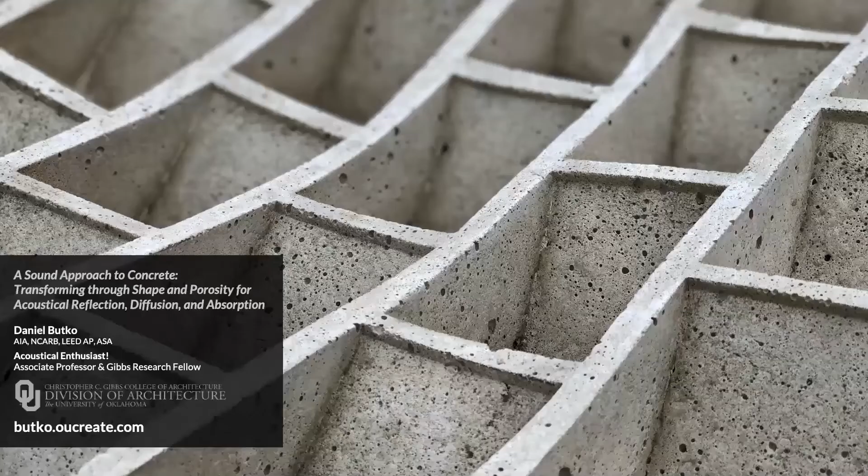Welcome to A Sound Approach to Concrete. My name is Daniel Butko, and I am excited to share some acoustical research.

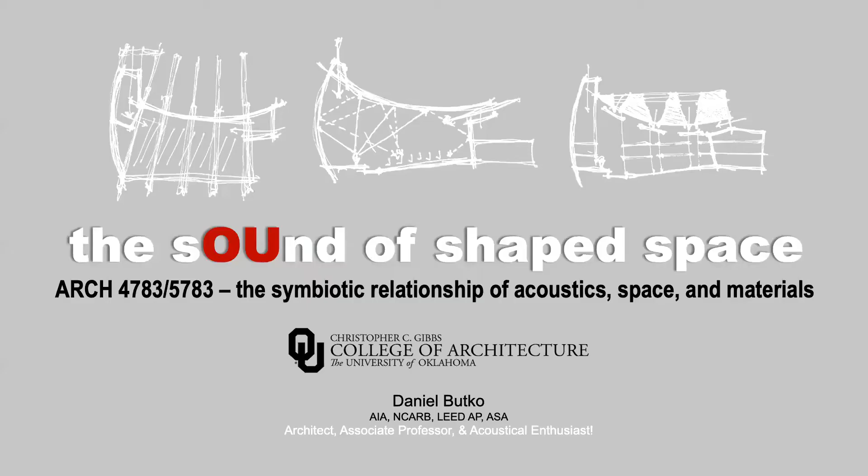Other than incorporating acoustics into design studios and materials and systems courses I teach, I also introduced an undergrad and grad elective titled The Sound of Shaped Space at OU over a decade ago. This course has also fostered continued acoustic research over the years, including some of the content in this presentation. Student accomplishments have been recognized by the Acoustical Society of America, the AIA, and other organizations.

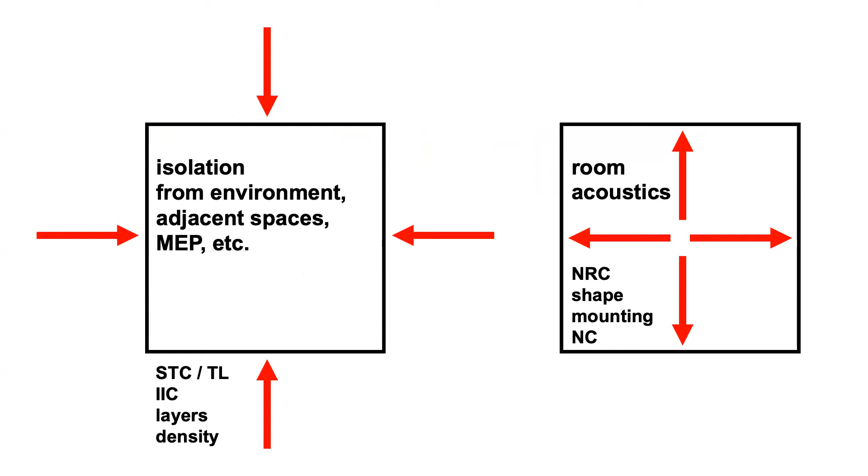As designers and architects, we have access to various codes and guidelines which help produce healthy and supportive aural environments. At its most basic, sound is typically wanted and noise is not. Architectural acoustics deals primarily with two aspects of sound and noise: the exterior or external isolation between spaces, and the interior or internal room acoustics of how sound and noise interact with the shape, the layers of materials, and the impact on the occupants.

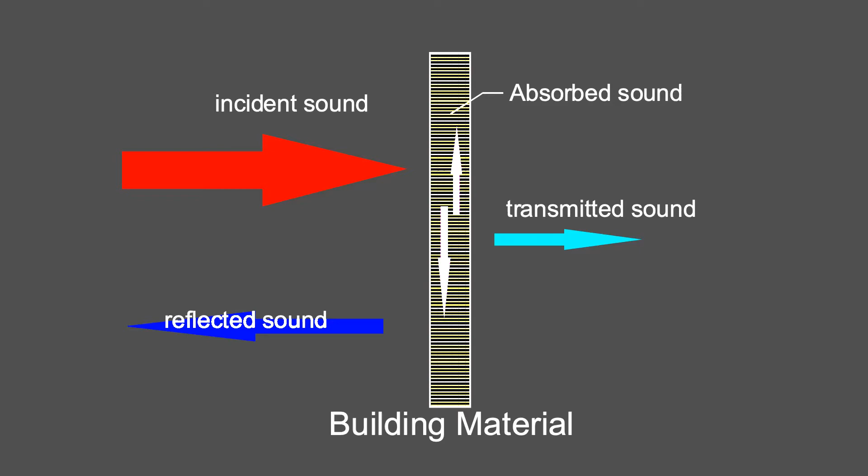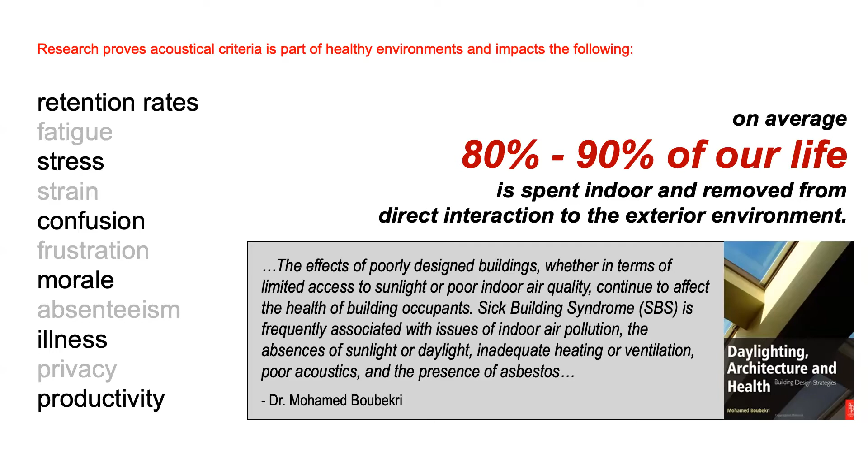As frequencies of sound and noise interact with wall and floor assemblies, they can be reflected, either specular or diffuse, and then absorbed or transmitted into or through those layers of materials. The aural environment has a direct impact on human perception, emotion, health, productivity, etc. Various statistics relate occupant behavior and health to acoustical properties.

Sound. It's not just the air vibrating, sound means feelings. It refreshes our minds, soothes our hearts, it can make us happy or sad or excited. It also is essential to the communication of ideas and the exchange of information. It's vital to daily life.

That's my version of a simple yet profound statement that's used as an anechoic recording in virtual environments, modeled in EASE software, to generate spoken simulations or what are known as auralizations of design concepts.

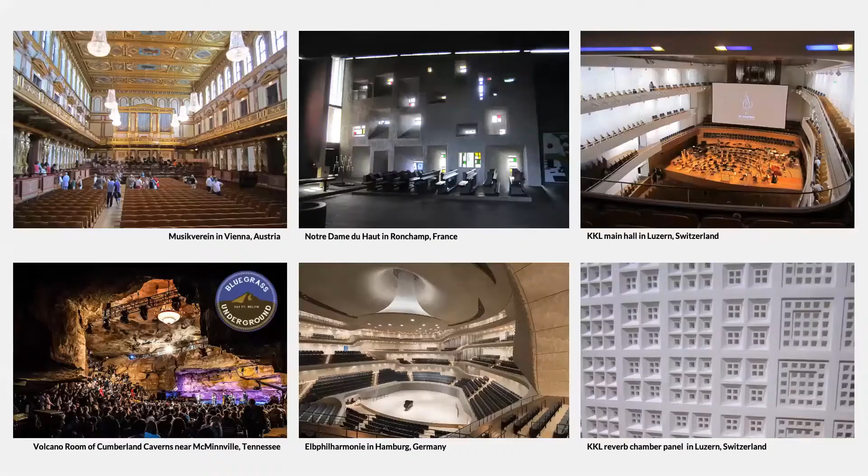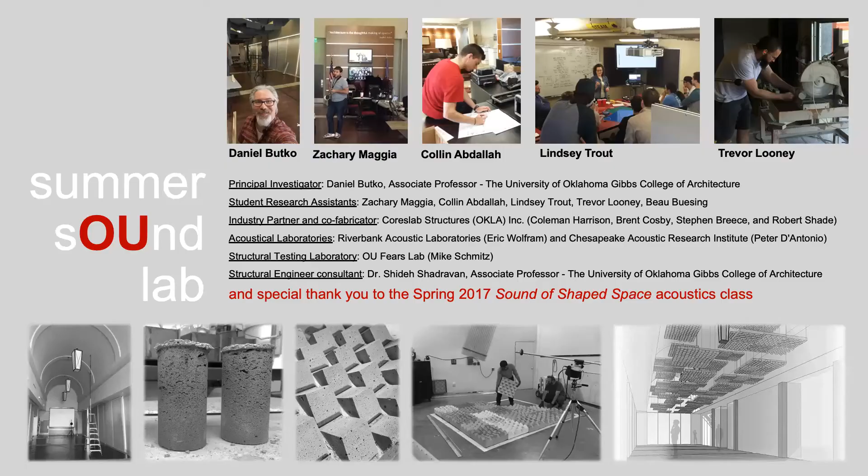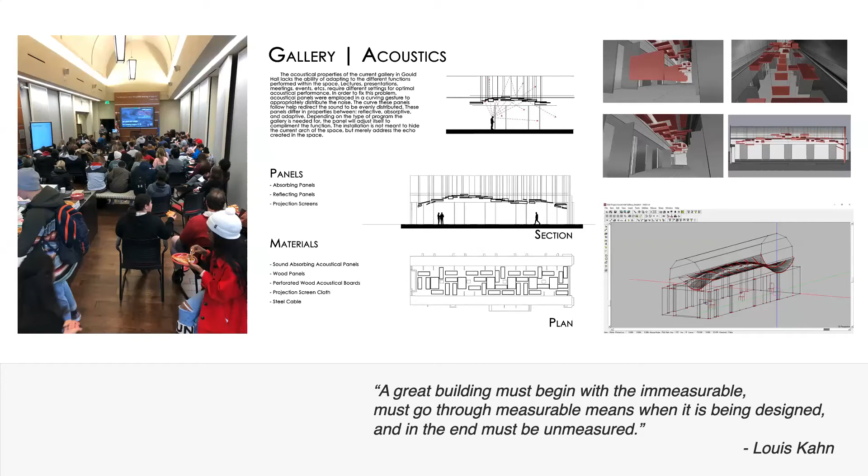Current research and the main topic of this presentation began in the spring 2017 acoustics elective and rolled over into what we called the Summer Sound Lab and various other phases of data collection and prototype development in the years that followed. Student researchers and I evaluated spaces for common acoustical deficiencies, which identified a gallery space as a place-based physical sound laboratory for collecting measurements and developing initial concepts.

The team analyzed the space and surrounding enclosures using equipment calibrated to collect quantifiable acoustical data per ASTM standards. Recycled denim blankets were also used to define a more absorbent control and develop accurate virtual models in EASE software.

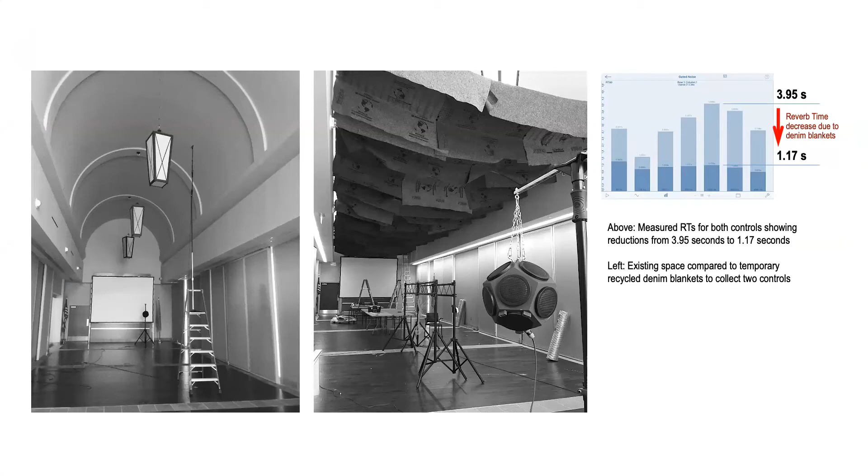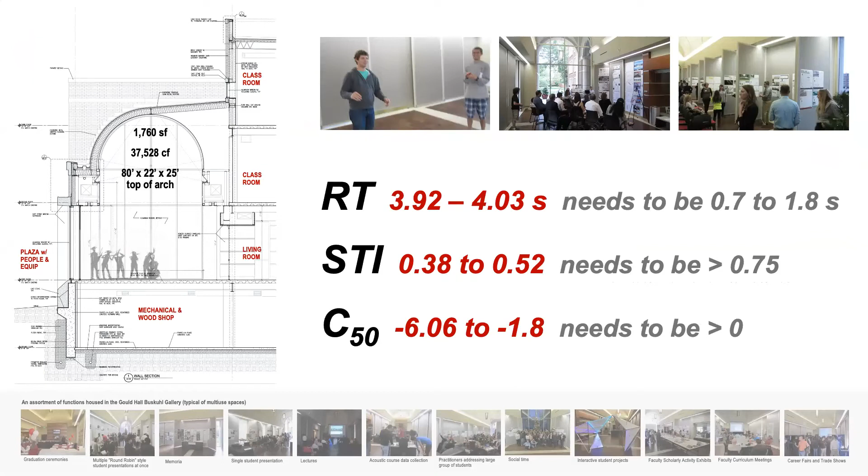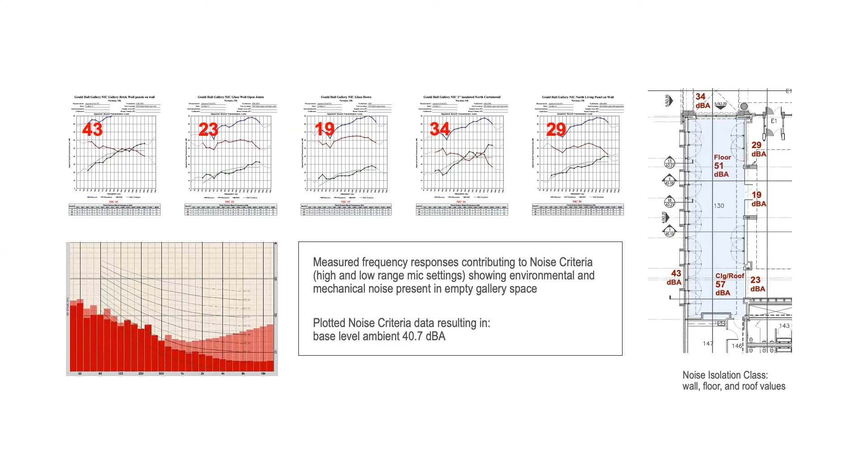Occupants report discomfort and confusion related to acoustical issues in the space, primarily a lack of comprehension based on the acoustically reflective materials and spatial volume, producing high RT, low STI, and low C50. The measurements also demonstrated low noise isolation class or NIC values, which are similar to a field or apparent STC test for wall and floor assemblies, also causing noise criteria NC to exceed published recommended limits.

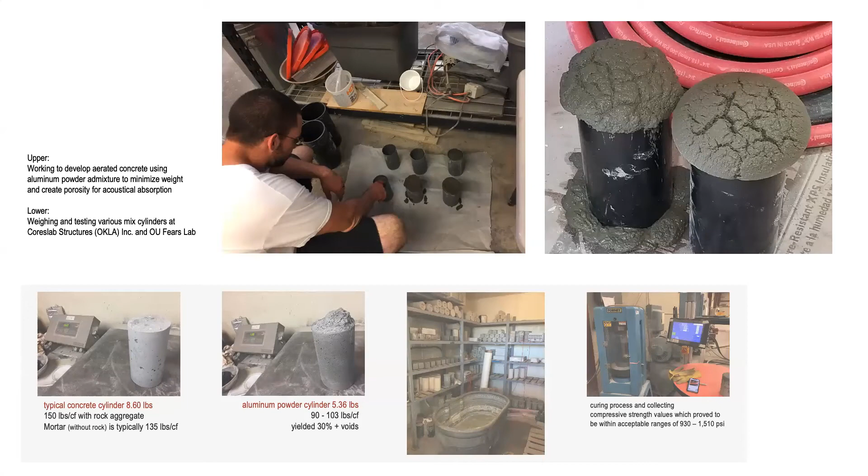Literature reviews and experimentation led the team to begin exploring concrete for its potential as an acoustical material. The recipe and shape can complement density to provide reflection, diffusion, and absorption of sound waves. Concrete samples containing variations of numerous additives such as flax, silicone oil, nacre, crumb rubber, vegetable fibers, pumice powder, walnut shells, and aluminum powder were developed and tested.

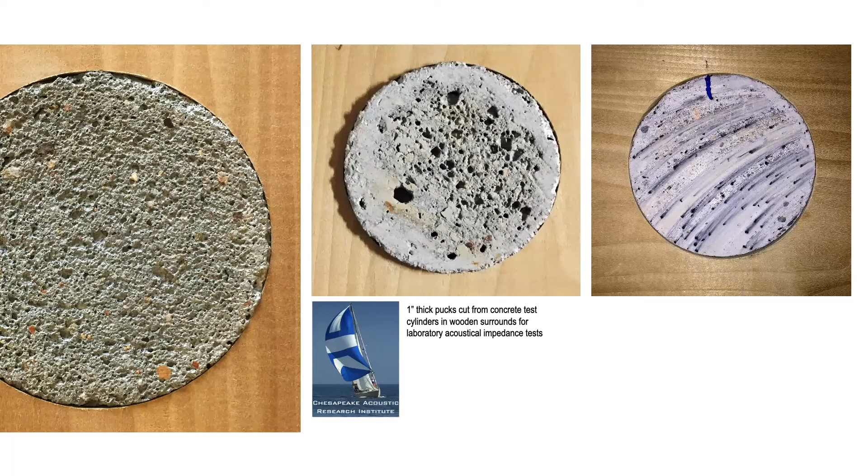The cylinders were cut into 1-inch pucks and combined with other samples from industry partners for separate ISO impedance tube acoustic tests to determine NRC values. The results showed weight differences along with variations in porosity, shape, and size. The team continued with concrete mix designs of various percentages of aluminum powder and both white and gray type 1-2 cement due to particle size affecting the reaction time and subsequent surface and interior porosity.

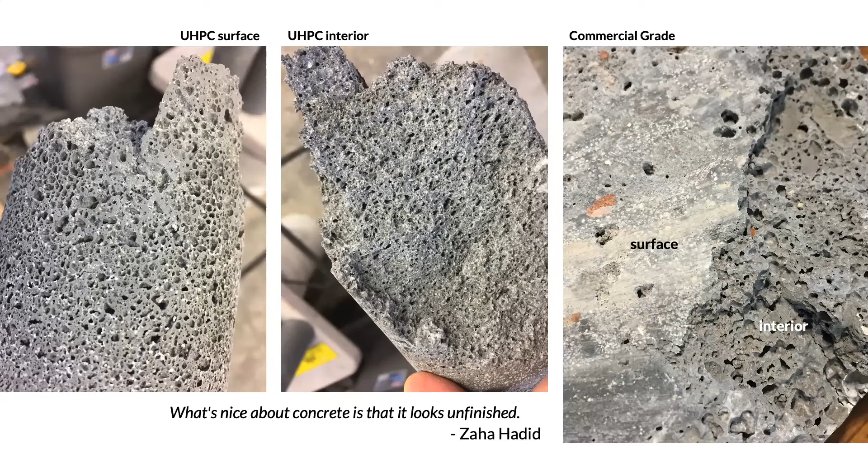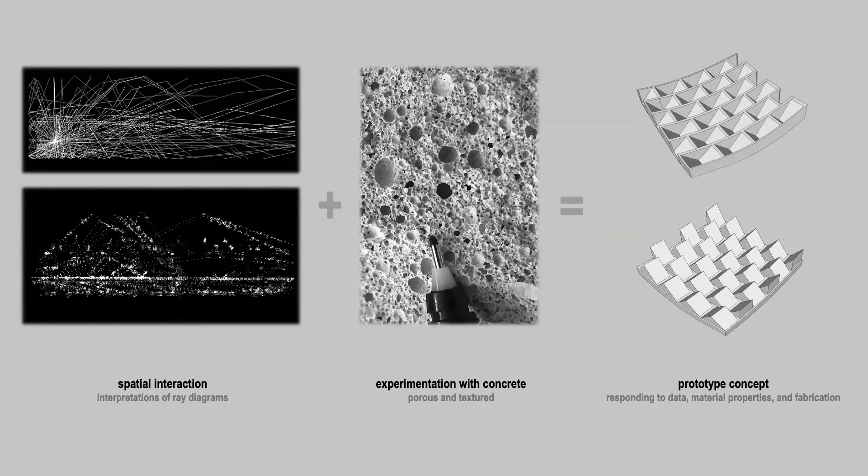The aluminum reacts with the cement to create hydrogen gas bubbles during hydration. Sound is absorbed through friction as it navigates through the pores. Evaluating sound wave interactions and experimentation with material science yielded data-driven designed panel concepts. Material and form directly connect to acoustical requirements while being feasible for addressing deficiencies in spoken word comprehension.

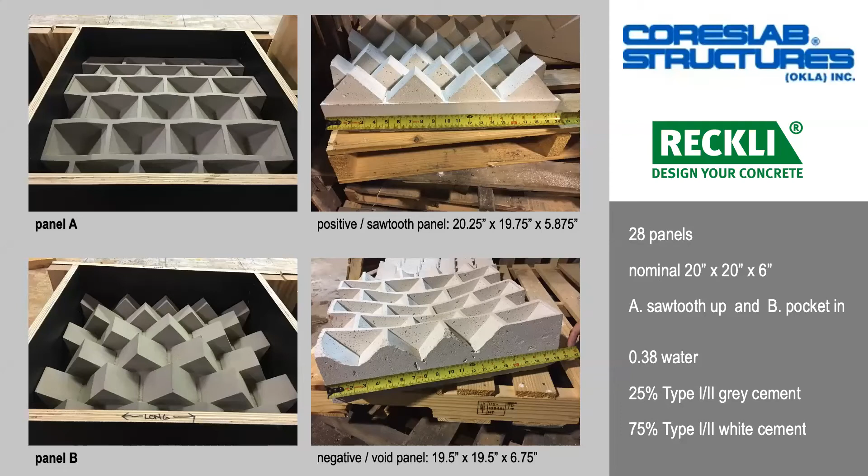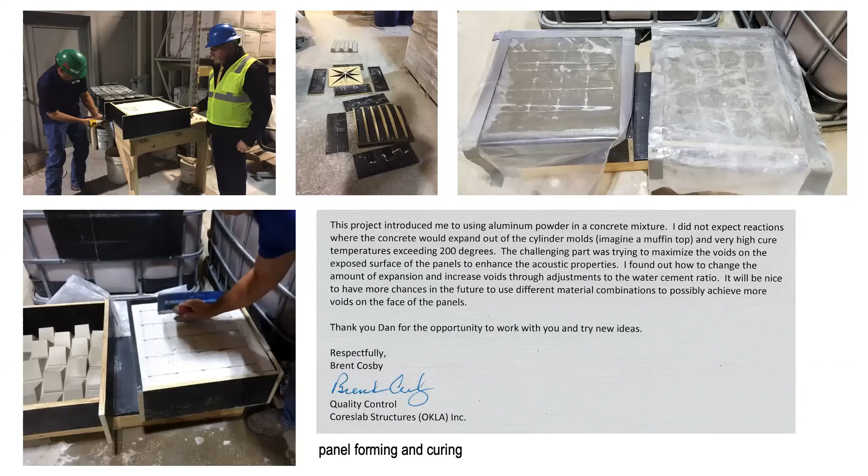The team worked with industry partners to fabricate custom concrete panels with nominal dimensions of 20 inches by 20 inches by 6 inches and mean weight of 94 pounds. The collaboration also led to additional conversations to consider integrating the shape and porosity used in the prototypes into large-scale optimized precast concrete panels and planks usable in various project types. Here's an example of the form being stripped from the panel. The concrete experimentation yielded prototype concepts with a working name ADALAC, acoustically diffuse and absorbent lightweight aerated concrete.

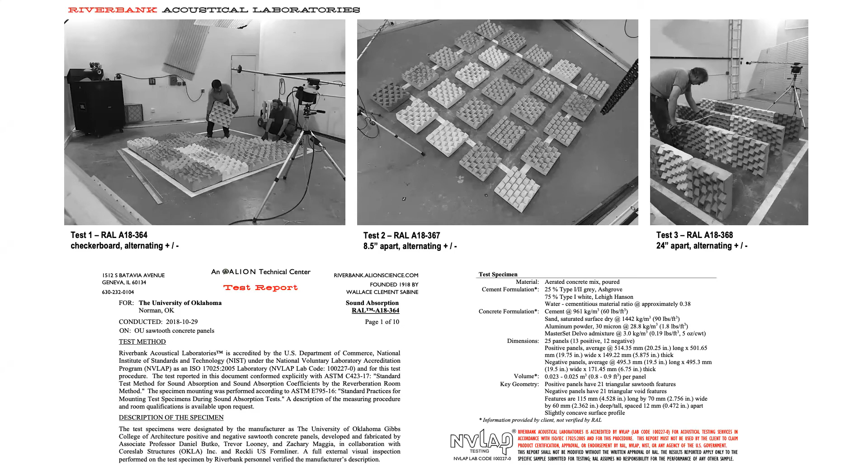Riverbank Acoustical Laboratories in Geneva, Illinois performed 3 reverberant chamber tests, which emulated potential installation methods as suspended panels, banners, and/or wall or ceiling surfaces. The 3 tests resulted in NRC and equivalent or apparent values, due to the space between some of the panels, of 0.3, 0.4, and 0.2. There were notable increases in specific frequencies when comparing the results of tests 2 and 3 to test 1 as the control. Aside from the spikes in test 2, test 3 added an increase of 99.7% Sabins of absorption at 125 Hertz, which helps in rooms requiring extensive low-end absorption.

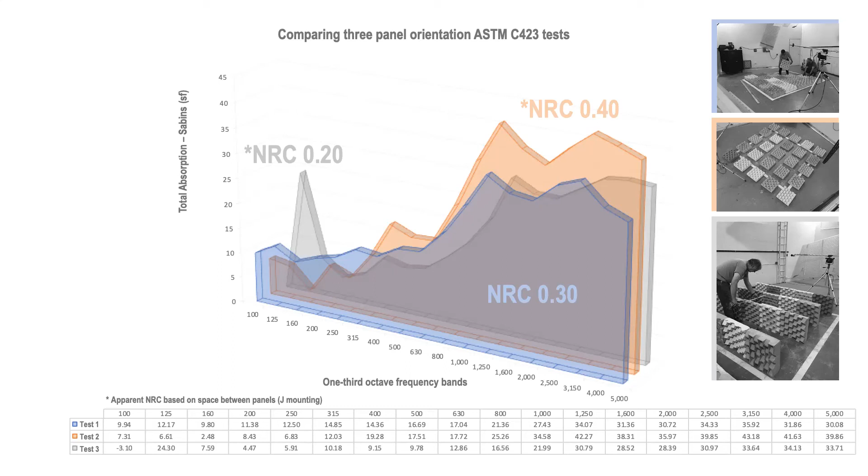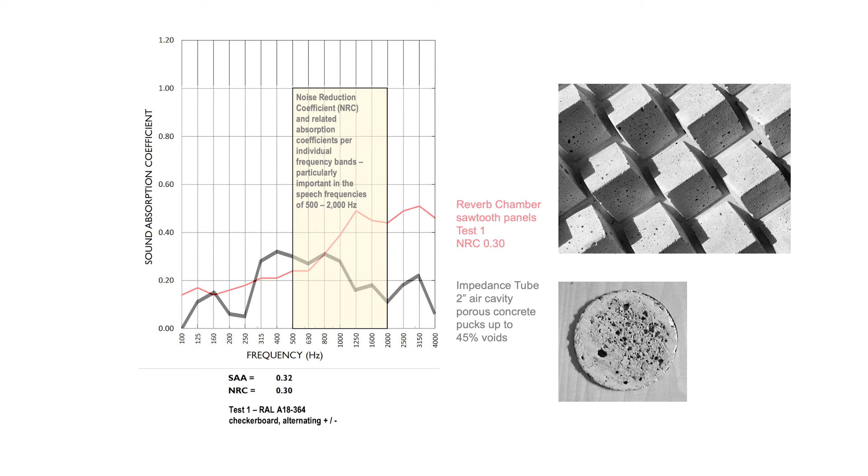Comparing results from the reverberant chamber tests and the impedance tube test revealed the translation between material and form. When compared to the existing empty room data, the prototypical panels produced upward trajectories in all associated acoustic criteria through both hypothetical auralizations and graphed numerical data. The various ADALAC configurations decreased the reverb time by 34.9 to 68.1%, with viable options in the low-mid 1 second range necessary for less reverberant scenarios in multi-use spaces. So here's an anechoic recording of that statement I mentioned a few minutes ago.

Sound. It's not just the air vibrating. Sound means feelings.

And then using that same recording as an auralization in the existing empty space.

Sound. It's not just the air vibrating. Sound means feelings.

And then using an ADALAC configuration with that same recording.

Sound. It's not just the air vibrating. Sound means feelings.

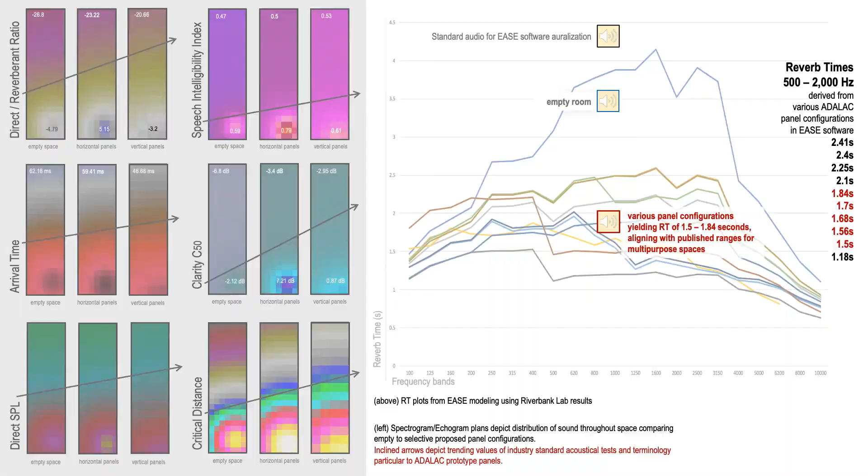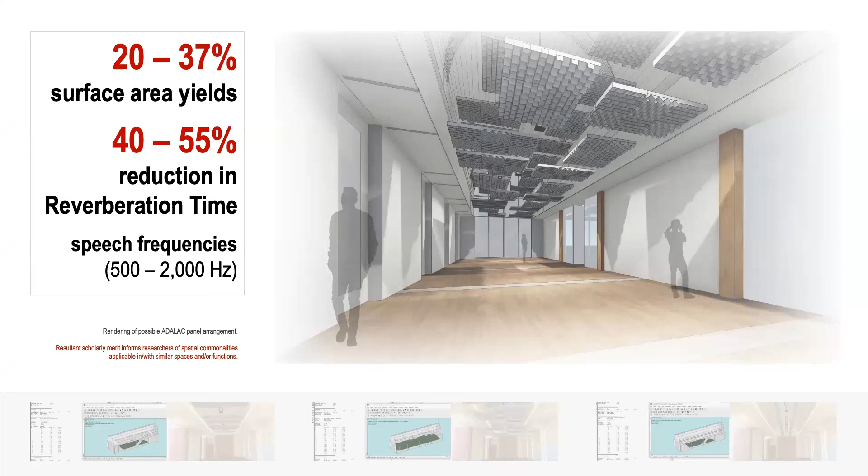The compiled data indicates replacing 20 to 37% of a room's surface area with the aerated faceted concrete panels, or suspended in the space, will yield a 40 to 55% reduction in RT at speech frequencies. Data collected on the various concrete pucks and subsequent calculations suggest for every additional 10% of voids per volume, the average NRC values focused on speech frequencies increased by 0.0575 within the concrete mix. When accounting for the panels and sawtooth facets, the total NRC increase is approximately 0.07 per the same 10% voids, with noted heightened absorption in specific frequencies due to panel orientation.

Future research includes utilizing aluminum powder with more recycled content, substituting some cement for fly ash, which might result in undesired smaller pore sizes and heat-induced internal sulfate attack when concrete is subjected to high temperatures at the early stage, especially with fly ash, which typically contains additional aluminum.